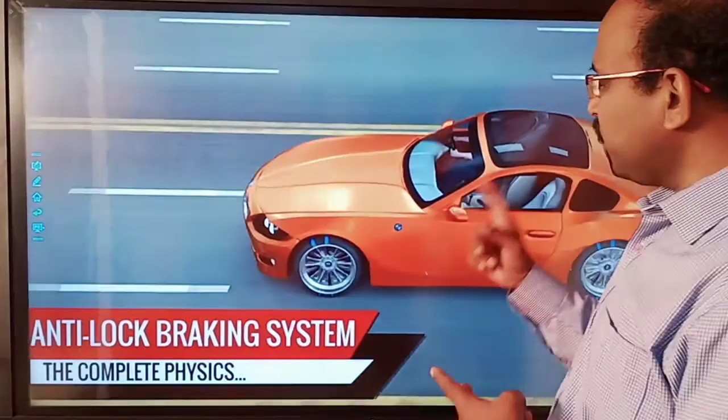Suppose your vehicle is moving. What is the problem with your vehicle? Suppose you are taking a turn, correct? And you want to avoid the obstacle. Suppose there are barricades. You want to move from this side, you want to avoid the barricades. But because of speed, if you want to take a turn, it will not happen.

Second thing, suppose there is oil on the road. I go again. Here, see, you want to go this way. You want to avoid the barricades, correct? Or suppose there is oil on one side, and you are just applying brake.

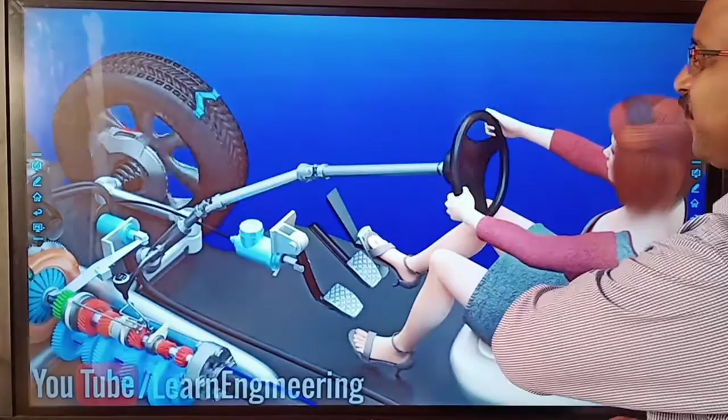Then it will rotate, there will be skidding action. What if you are doing this? See, you can see the steering action. Steering, you are turning and you are applying brake.

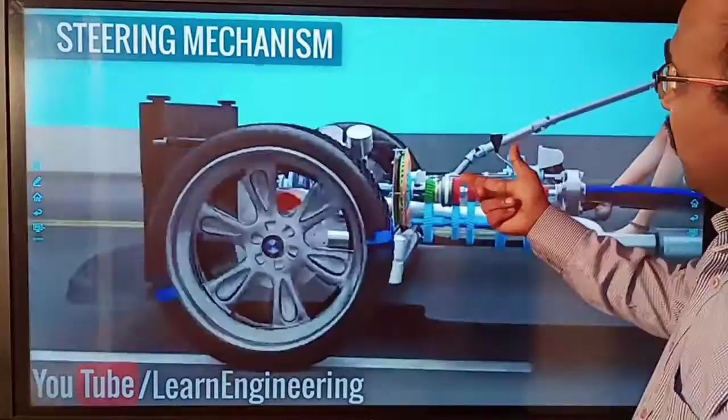As soon as you press this brake pedal, the car will try to stop. See, this wheel is stopped, this is not moving. And if you change the wheel, if you move the steering, you want to take a turn, correct? Then it will not happen.

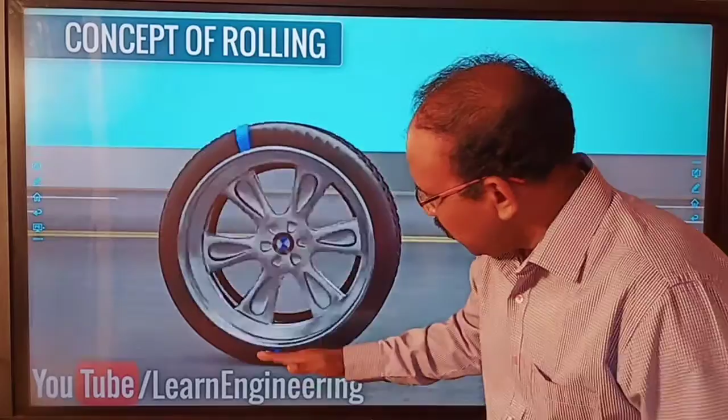See what happens inside, this. Now suddenly if you want to check this, we will see how forces are acting. So here, as this moves, whatever the velocity of this and this is matching exactly, there is no friction at all with normal speed.

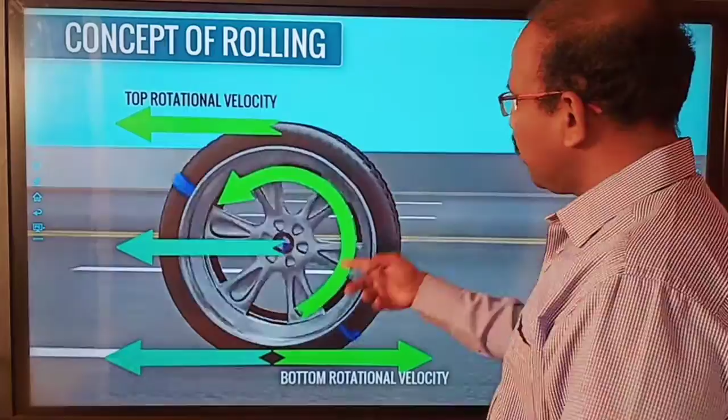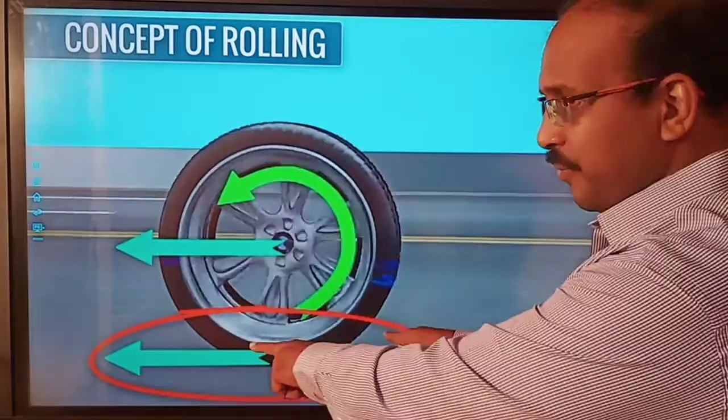So there are two actions: one is rotary motion, and this is what we can say translation type, linear motion. There are two motions, rotary motion and linear motion. Now if they are matching, velocity of this side, friction is almost zero, so that's why it is moving in forward direction.

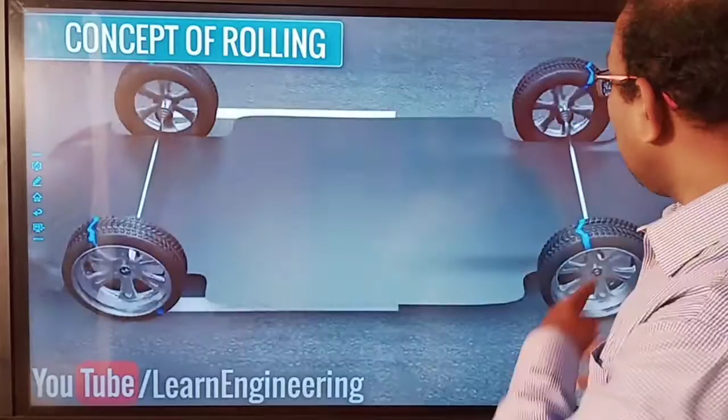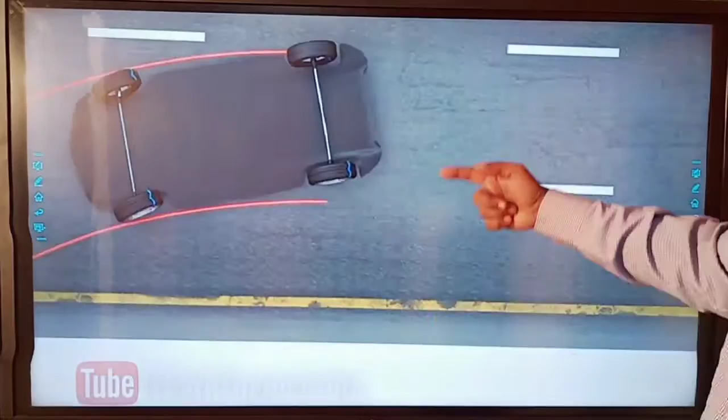Now what will happen? Suppose there are four wheels. So if you apply brake and if you want to take a turn, see how this is moving. See, this has more velocity than this, this wheel and this wheel. It has less number of rotations as compared to the outer wheel.

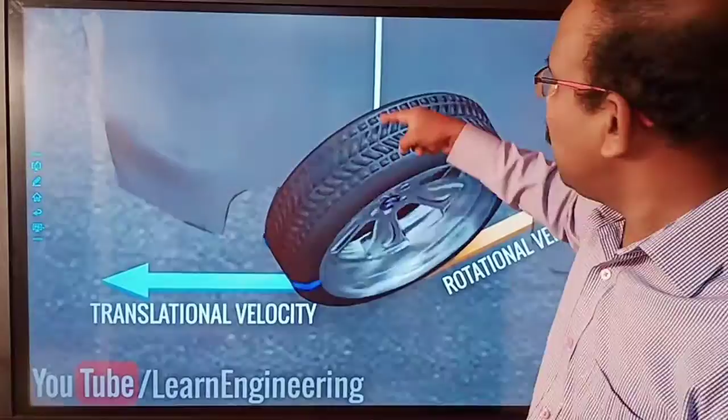But this will not allow this. Whatever the number of rotations will be same. Suddenly if you apply brake, if this is moving, it will have rotational movement. But because of inertia, it will go ahead. Whatever force is applying, that is there. If it is moving, then it will move this side.

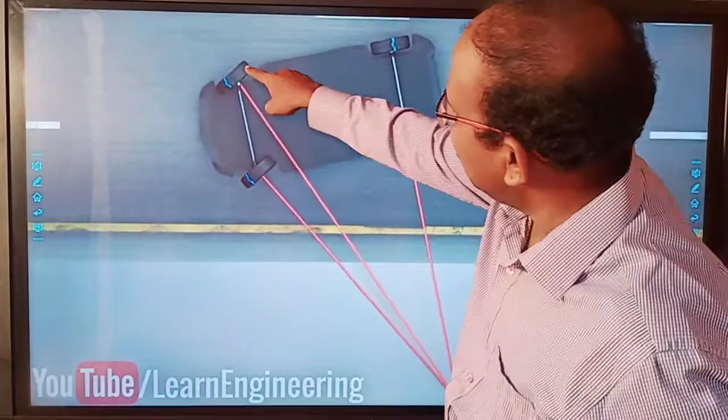If this is not moving, see the length, what we can say radius. This has got more radius as compared to this, so this has to move fast as compared to this. So two wheels will not move with the same speed.

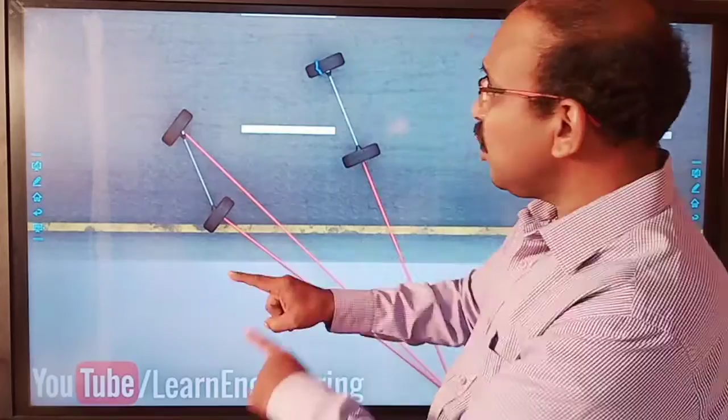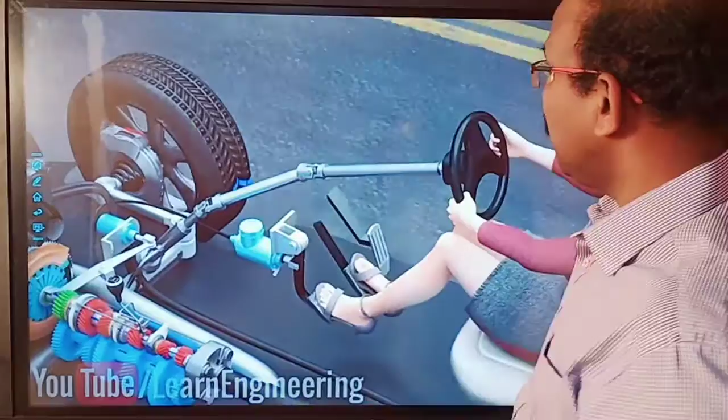Then who will manage? Now if this is moving, then it will move this way. If it is not moving, then what will happen? See, suddenly when you apply brake, this will stop and you are taking a turn. That time, because of inertia, it will go ahead. It will not move this way.

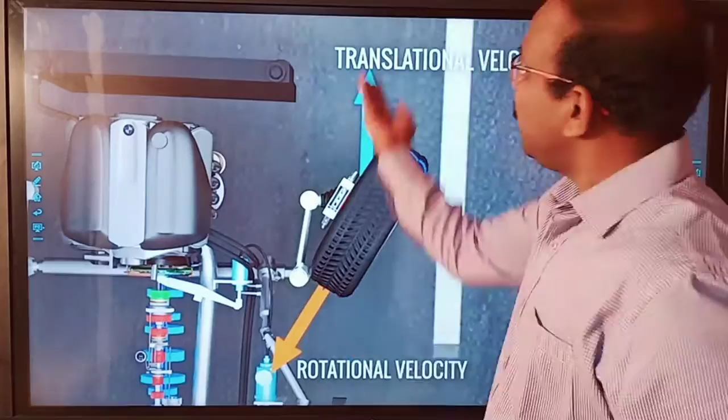You want to avoid the obstacle, correct? But you have suddenly applied brake, so you want to take a turn. But it will not, because the wheel is not moving. Wheel is not moving, and suddenly, see, there is an accident. Why?

Because, and the second thing, suppose there is oil and you suddenly apply brake. So whatever the oily portion, it will skid more as compared to other portion. That time it will take a turn again. How to solve this problem?

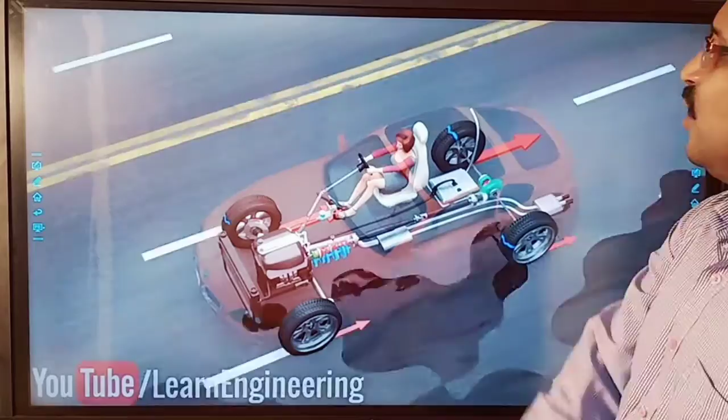That time it is called anti-lock system. So it will move like this. So then what is the anti-lock system? See how this problem is solved.

There are two problems. One, suppose your vehicle is at high speed and there is an obstacle ahead. With that high speed, you want to take a turn. But because of the obstacle, you have applied brake. As soon as we apply brake, the wheel will stop moving.

At the same time, you want to move your steering, but the wheels are not moving. Because of that, the car will not take a turn. Car will skid. Second problem.

If one portion is more oily, even in rainy season also, we see oily surfaces, oily roads. That time when we apply brake, one wheel will give less friction as compared to other. Because of that, the movement of both wheels will not be same. Even though we stop that, skidding happens, and skidding will be more to the oily side.

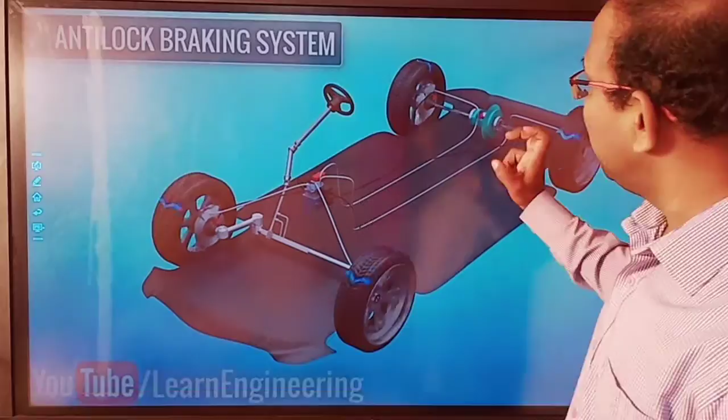So we can see this. There is one system we introduced, now this is the anti-lock braking system. So what we do, there is a pad, like a locking pad, and here we introduce an electronic system.

It will make pulses. This is the modulator unit. See how it is making on-off, on-off, on-off here. It is not continuously moving, it's on-off, on-off. When it applies, it stops, that time there is a friction force, and otherwise it will move.

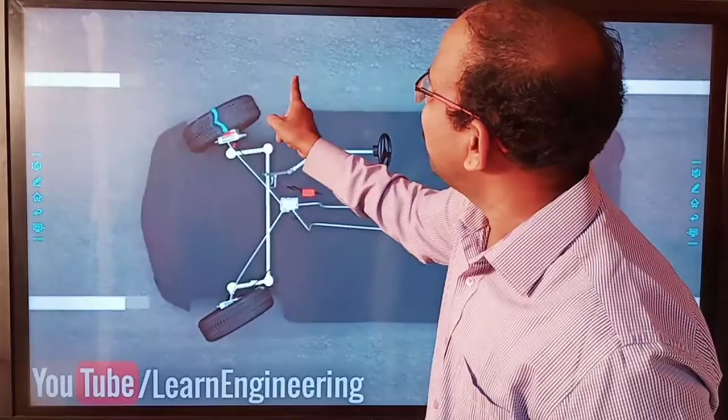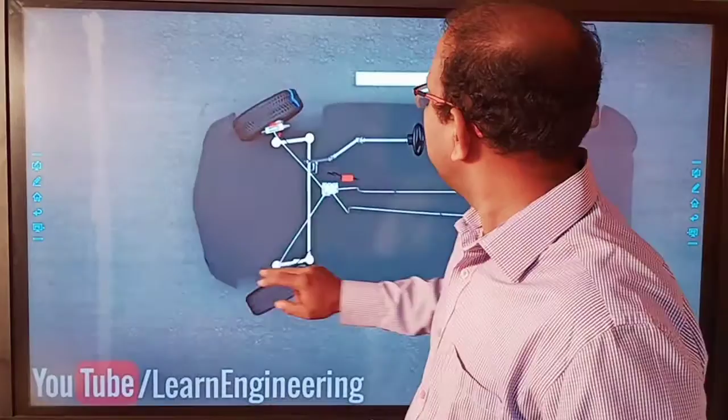It is turning also, and see, this is like an obstacle. If I compare two systems simultaneously, suppose there are two systems, it will take a turn and it will stop also. If I compare this with an ordinary part, now it is taking a turn and also applying some braking action, so I want to tell you something.

If I compare two things, this is with the ABS system and this is without the ABS system. Practically, here you are applying brake 100%, so your wheels are completely stopped. Here, wheels are modulated.

On-off, on-off, on-off. So this should travel more distance after applying brake, but no, this will travel less distance compared to that. Why? Even though wheels are moving, this will apply urgent brake compared to the other, because that one has a skidding problem. This doesn't, we don't allow that skidding here. So skidding is restricted to 12%, which is exactly the maximum friction point.

We get skidding at 12%. So if we compare both ways, this is without ABS and this is with ABS. So this is more effective.

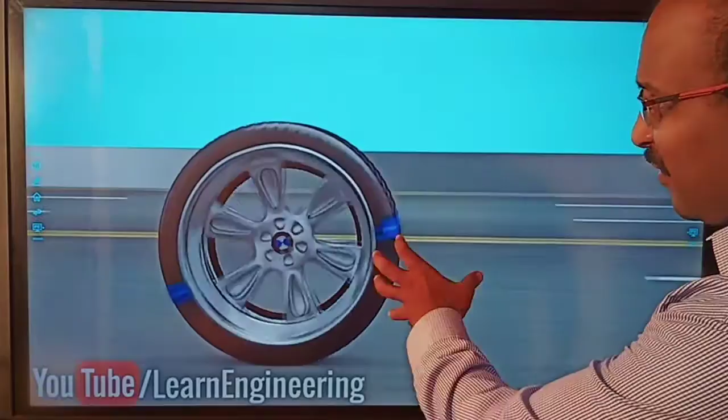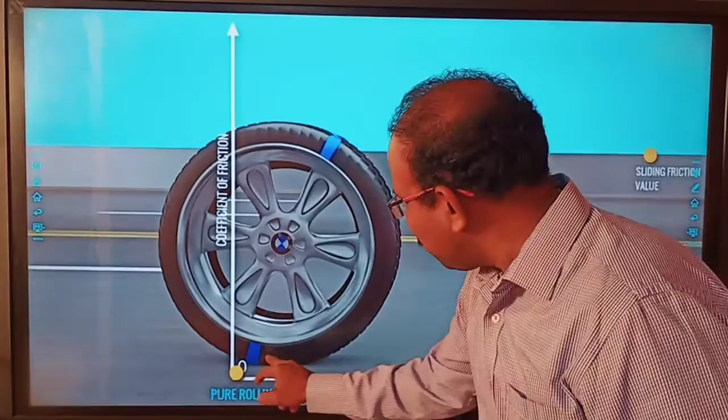What happens exactly if I consider the friction with the wheel? This is a rubber body. So when we apply sudden brake, it will have changes in that. See how the friction is applied. If I say this is slip, or this is the speed, correct? So this is not moving, moving means speed is zero.

But because of that, some deformation occurs in the wheel. It's like a rubber body, so it will have some deformation.

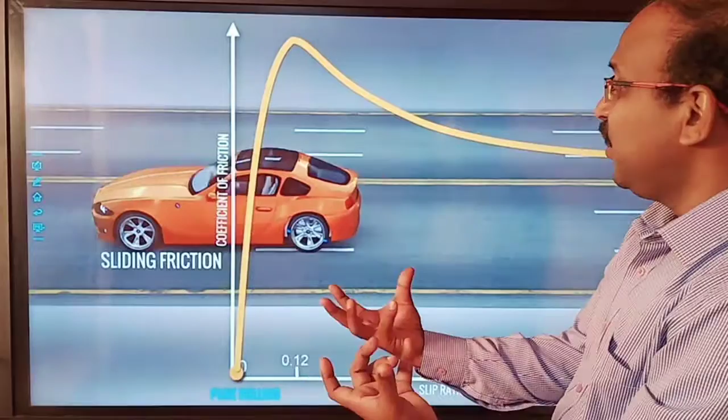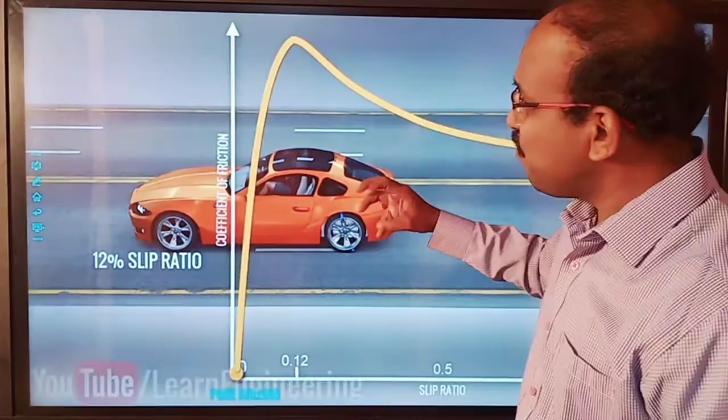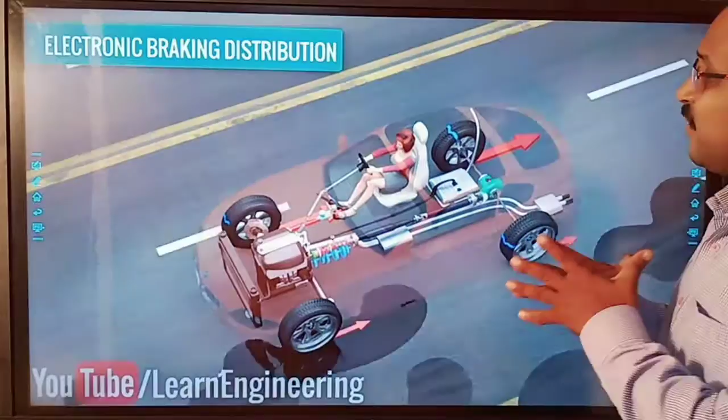The car is sliding, see this car is sliding. If we apply some modulation, that is the ABS system, then the car will stop here and the friction is exactly maintained for 12% only, that is the maximum achievement. So this is, I guess, a review of this.

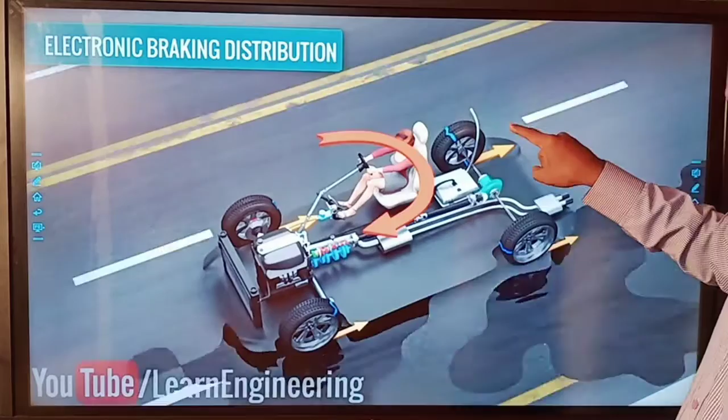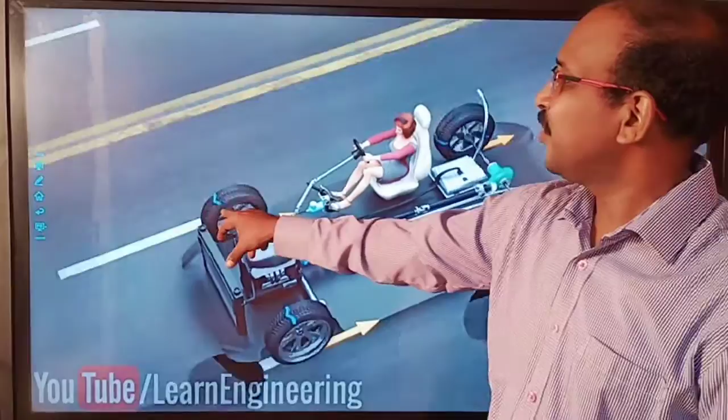So without an ABS system, the wheel will rotate, but with ABS, see, it is not moving, it is not rotating. You can see more videos on YouTube to clear this concept. The only thing is there is a modulation technique, see how the brakes are applied. Even at high speed, brakes are applied, and even on an oily surface, it is not sliding, it is not skidding. That is the main part of the ABS system.